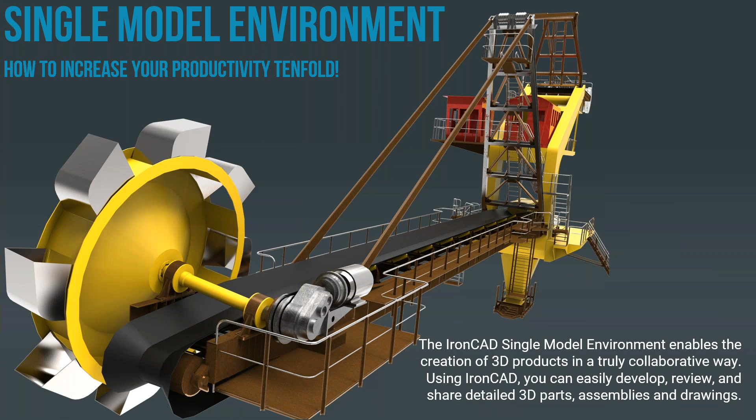This is your group of resellers who will work with you to help train, but let's get right into what is the single model environment, how it can increase your productivity tenfold. The IronCAD single model environment enables the creation of 3D products in a truly collaborative way. Using IronCAD, you can easily develop, review, and share detailed 3D parts, assemblies, and drawings. So let's go right into the product and see what this actually means to all of us.

So here we have an IronCAD scene set up for us. And one of the things I want you to notice right from the very beginning is you have a ribbon bar here across the top: the surfacing, assembly, sheet metal, the home ribbon, all these wonderful tools for doing 3D design, but I'm not going to use them because I won't need to. I want to show you again how this single model environment actually works. And let's start off by creating a mounting plate, and I'll show you how easy that is.

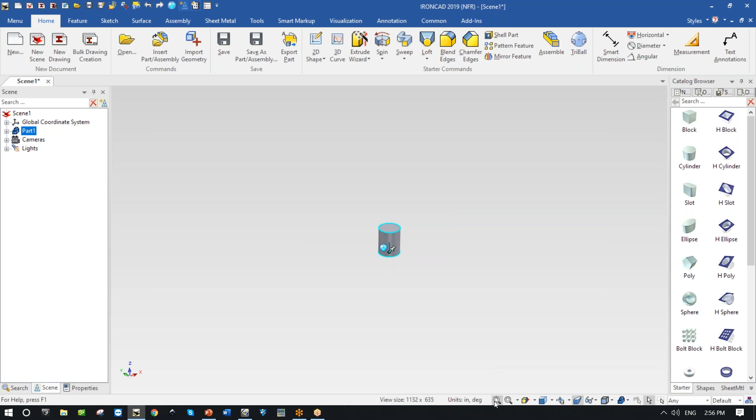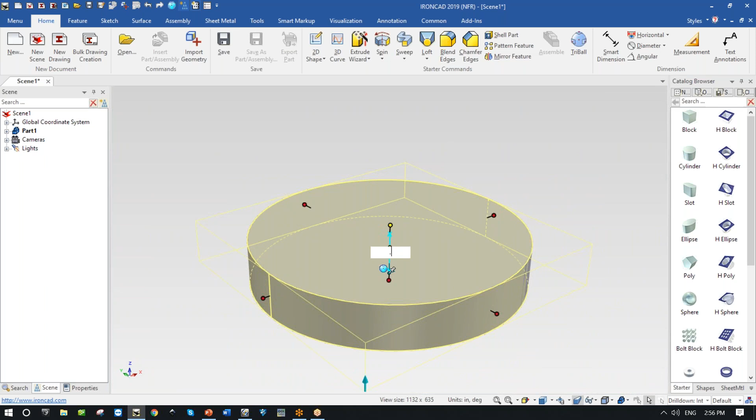We're in inches. I'm going to pick up an object and drop it into the middle of the screen using the left mouse button and simply say, well, I've brought in a 3D cylinder. If I click on that, I can now alter the size of the cylinder simply by saying, oh, I want this to be 6. And how high might I want this to be? Well, looking at it now, I think I'm going to have this maybe a 1/2 inch. That's actually the first part that I wanted to create. That's the back plate of the mounting flange, and I need to put a boss on here.

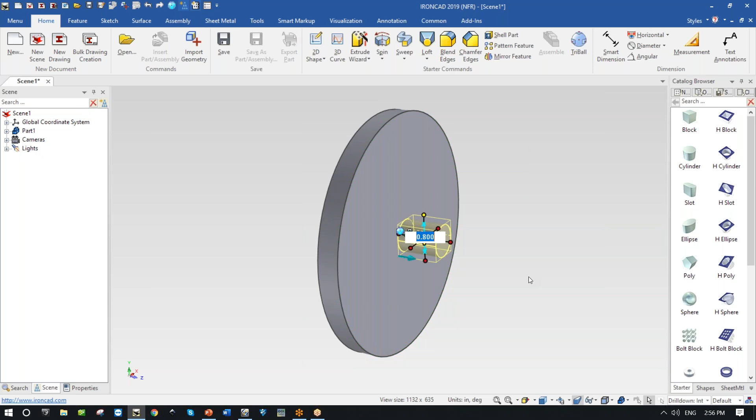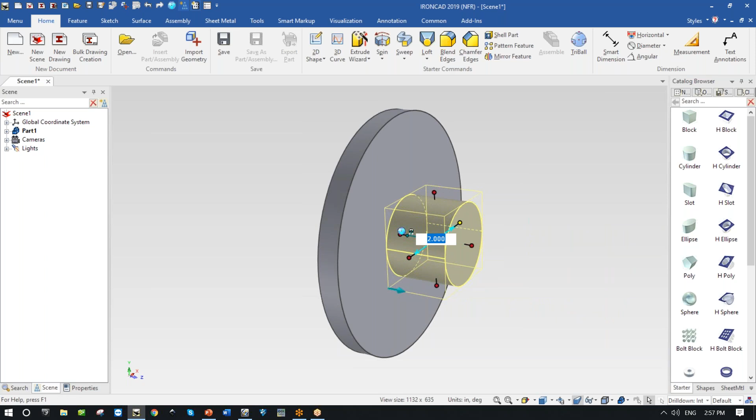So I'm just going to simply drag a part. Notice I'm using the left mouse button and I simply drag to the center. And when I drop it, it brings up another IntelliShape that lets me say, Bobby, how big should this be? It should be 2 inches. This front boss should be 2 inches by 2, and now it has automatically joined these two together. Notice there's no sketching. You know, I don't really like that, that's a little bit long. I'm doing some conceptual modeling. Make this only 1.5 inches. By the way, if I don't like to type in, I can drag this manually this way and then get it into position and then give it the fine tweak that I want.

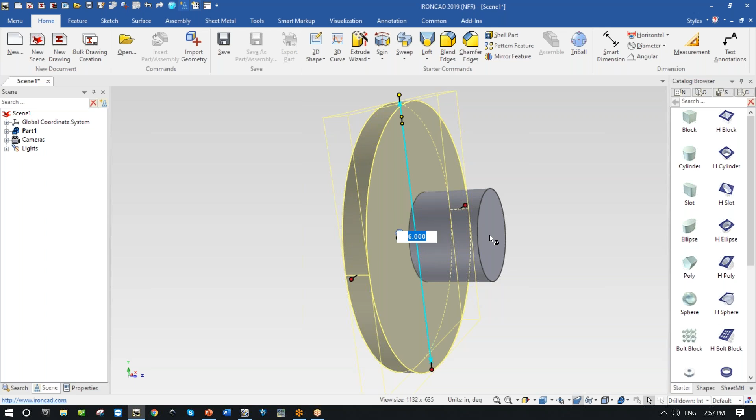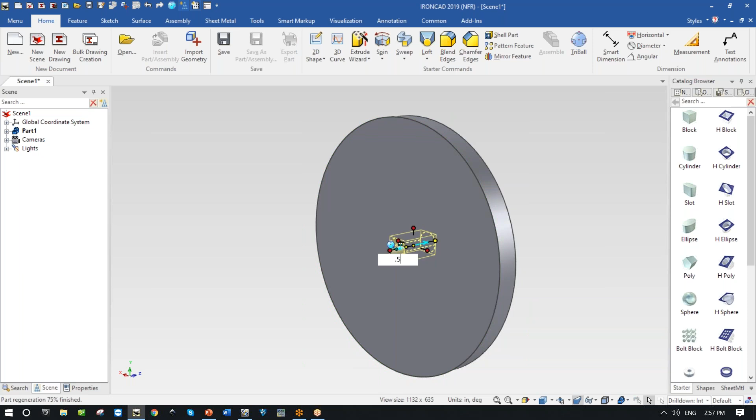Now I want to put a bolt circle, and this is kind of interesting here. I want to be able to pop in a bolt circle around the outside of this, and so I'm just showing you how that's going to work. Get those points off there. You notice we've dragged first a positive shape, being this one. We joined another positive shape to it. Well, now in this single model environment, let's grab a negative shape and simply put that at the center. Notice it finds the center of our part. Oh, 0.8, no, I want this to be 0.5 inches by how deep should it be? Make this hole also 0.5. So now I've got a 1/2 inch by 1/2 inch hole in the middle of my part. I don't want it in the middle. I want it to be out here.

That allows me to introduce something quite remarkable, which is the IronCAD patented tool called the TriBall. And I'm going to use the TriBall in the simplest way I know how. I'm just going to pick up this handle, hold down the left mouse, and pull it out. Almost, nope, I want it to go out a full 2.5.

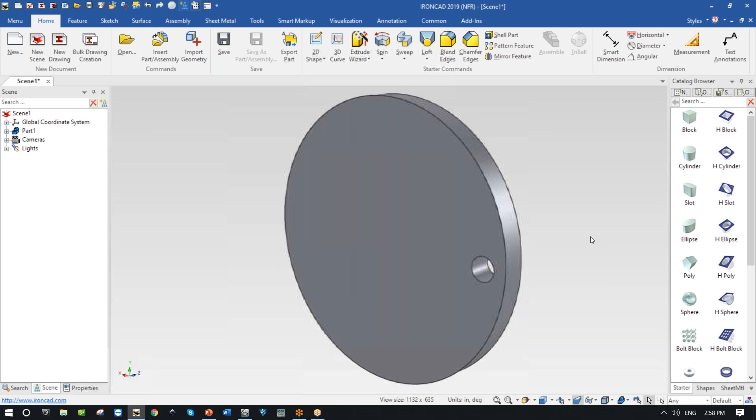Perfect. That's exactly where I want this bolt circle to start. Now notice we're not sketching. I'm just simply using the geometry that's there. And I'm going to use the TriBall again. And this time I'm going to use the space bar, tap, unlock it, and now move it to the center. Lock it again, and this time I want to create a pattern.

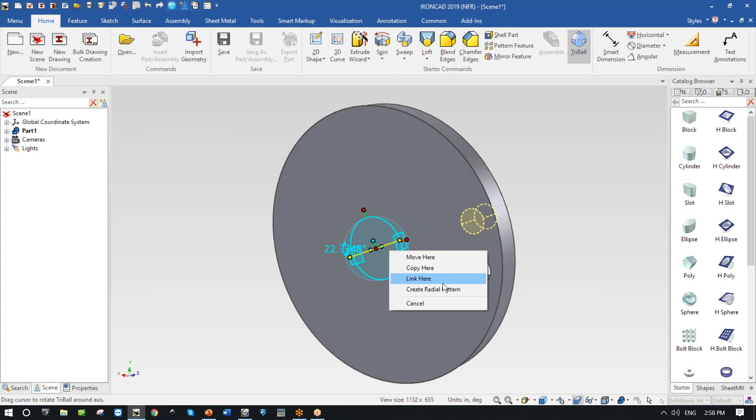How? Simply by using the right mouse button. Anytime I use the right mouse button in IronCAD, it brings up a menu. Go ahead and create a pattern for me. How many holes do you want? I want 12 holes. And what's the angle? I don't know. 360 divided by 12. Excellent. Done. I have now completed my first part.

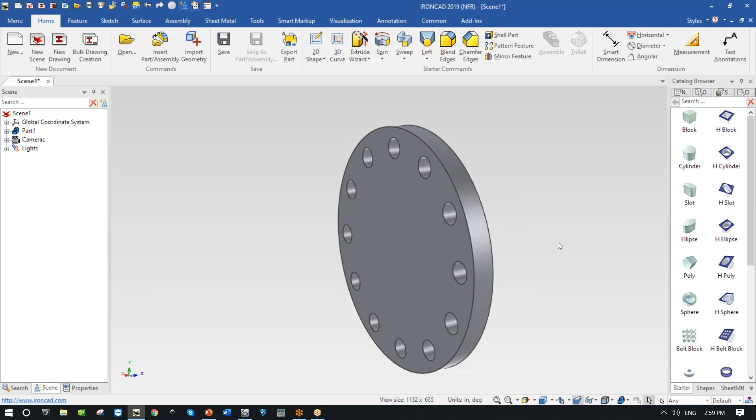So single model environment. I need another part. I need the rear flange. How would I do that? Well, let me just paint this for a moment. I'm going to paint it this color. And now let's put another one in the back. How do we do that? How do we add something to this? Well, gosh, I want to create something based on this.

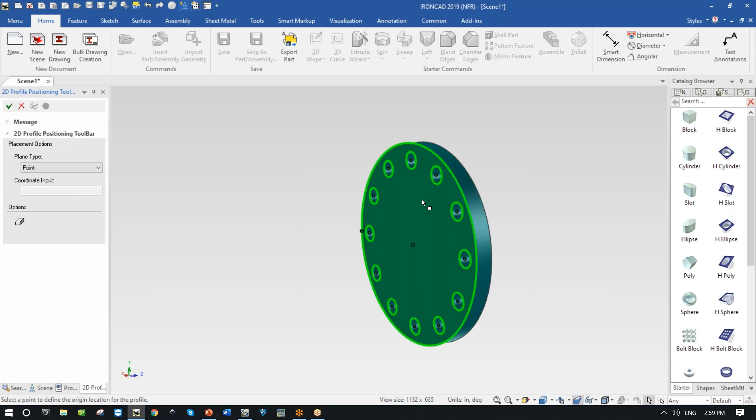So I'm going to use my extrude wizard. This is the first time I'm going to a menu, but I'm still not going to sketch. I'm going to come in and say, where do you want to start this new part? Here. Do you want a standalone? Yes, that's what I want. I don't want to add material. I want a new part. And it asks me, okay, no, I don't want to do any of those things. Oh, I want a 1/2 inch. What's the distance? 1/2 inch. Excellent. That's all I need.

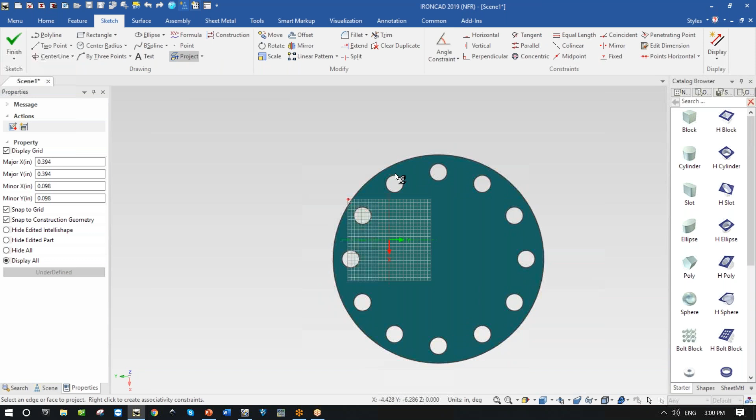Done. So now it says, Bobby, what are you trying to do? Well, I just want to take the geometry from this. That's what I want to use for my next part. Okay, great. It says, that's what you asked me to do. Use that geometry to create another part here. Single model environment. Now I can just start drawing on this new part. Well, I want this to be 3 by 2.

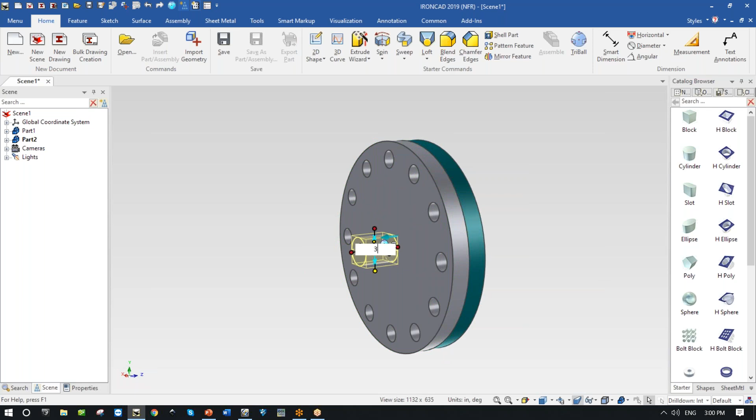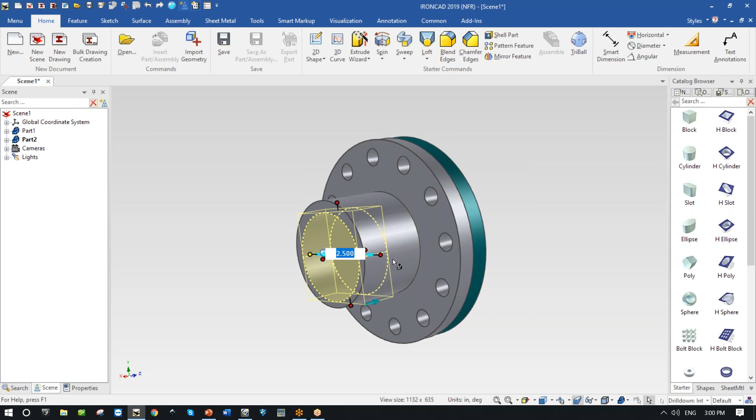Excellent. So now I've got the front flange, rear flange. Notice that it picked up the holes. They're in good position. Oh, I need these to have a hole going through them. So let me see. Drop this in here. How wide do I want it to be? Oh, 2.5. Excellent. And how deep should it go? I don't really know. You know what? I want it to go to the back of the flange. So that's right here. Just touch it, hold the shift key, and it finds it.

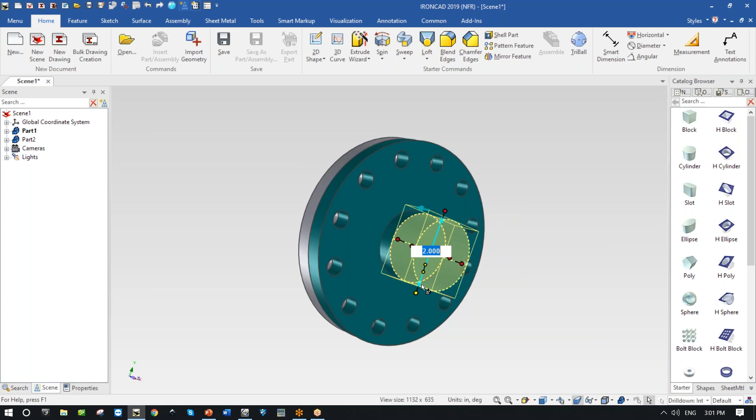Oh, I need a hole on this side too. Doesn't matter. Forgot to do it before. I'll come back and do it now. Remember, I made that too. But if I forget, all I have to do is come out like this and stretch it and say, how big is that? Oh, that's 2. I want it 1.5. Good. And how deep should it go in?

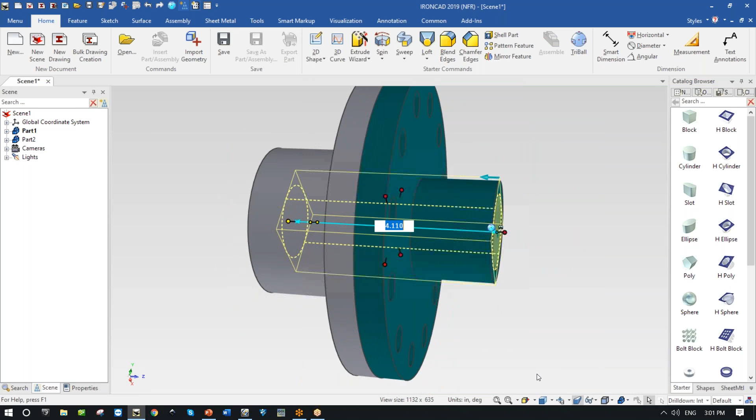Oh, just come right to, oh, moving it around. Silly me. Don't do that. I want you to grab this handle right here. I don't want you to move the whole thing around. And I want to pull this all the way into the part right there. And now it's cut. Oh, not quite. Let's see if we can get it to cut all the way through. Oh, you know what? I'm not even going to be too careful with it. Go ahead and cut all the way through. I've got one on this side, one on this side. Excellent. That's what I wanted.

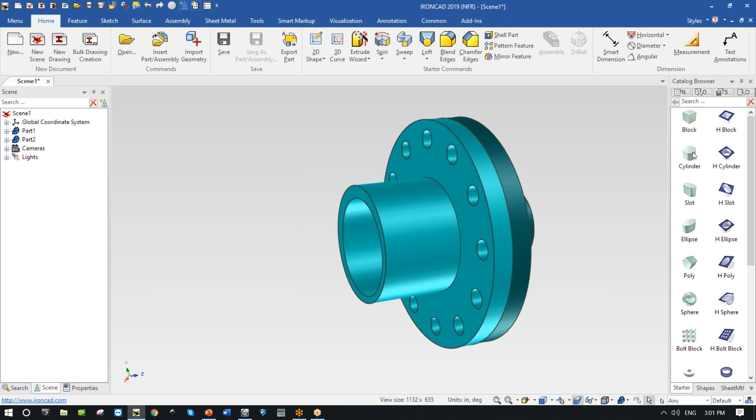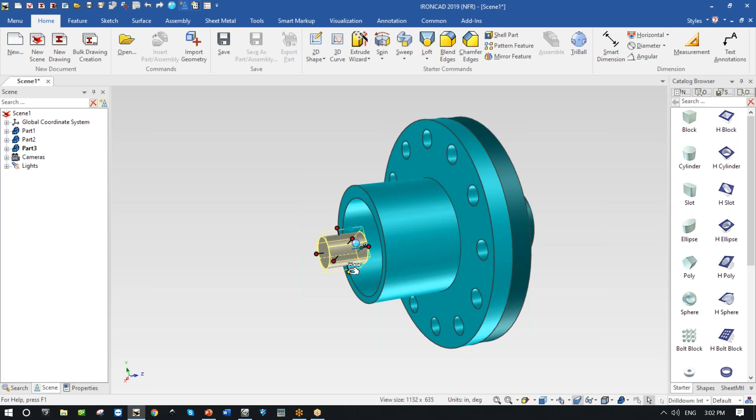And now this is my next part. Let me make this a different color. I'm just painting them so I can see. Excellent. Now, no sketching up to this point. Let's put a cap on here. Now, that allows me to show you another marvelous feature of this product, and that is using the drag and drop. I'm simply coming in now with the right mouse button instead of the left, and it says, do you want to add a feature to this? No, I want a new part. And so what I'm going to do now is come in and say, I want you to take this part. How wide should it be? I want this to be 3.

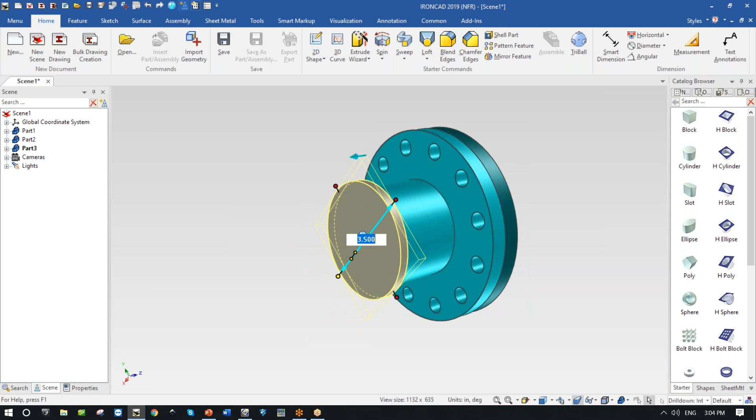So now what I want to do is I really want to take this and I want to make it slightly larger than that. Conceptual design. Yep, make it 3.5. And from the front, I want it to stick out about 1/4 inch. And back here, if I zoom in, I want to pull this maybe 0.75. So there's my cap sitting on. But if I look at the cap now and say, just show that, oh, there's no hole, there's nothing there. So show me everything.

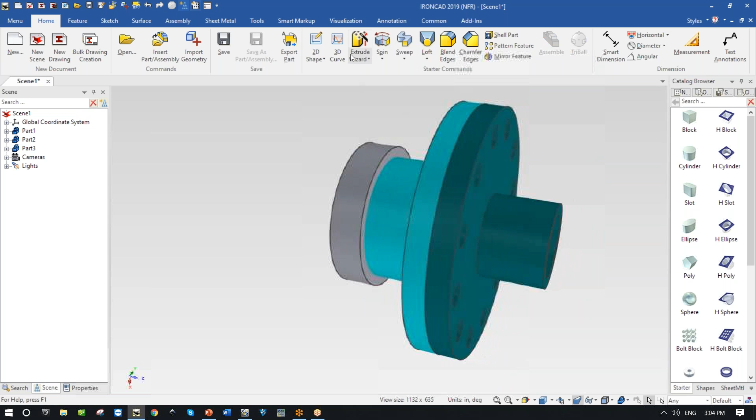Same idea again. I want to extrude right there. I need to now remove material using this wizard. And how much material do I want to use? Get rid of 1/2 inch. Good. And what are you trying to get rid of? Well, I really want to cut out this shape.

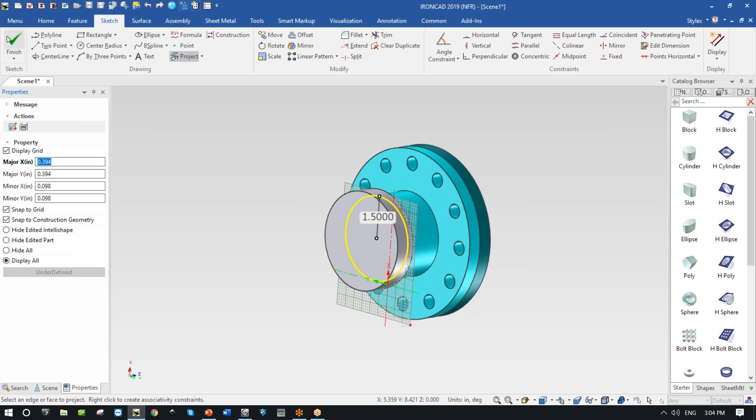And good enough, in that one quick thing, I was able to say, good, there, I've done that. Excellent work. So I've got my part, show me everything again. And remember, I haven't had to go in and find a lot of menus. I'm creating this geometry.

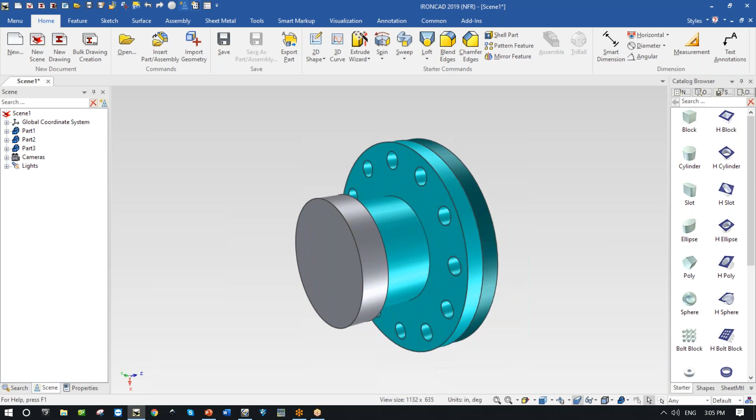So what about holding this together? Let's go grab one more interesting part from our catalog, and let's go grab a tool out of here. And I need to fasten this together. So let's grab a fastener out of our library that's included with IronCAD. And well, what are you trying to get? I want a screw. What kind of screw? I would like a socket head, yes, just like this.

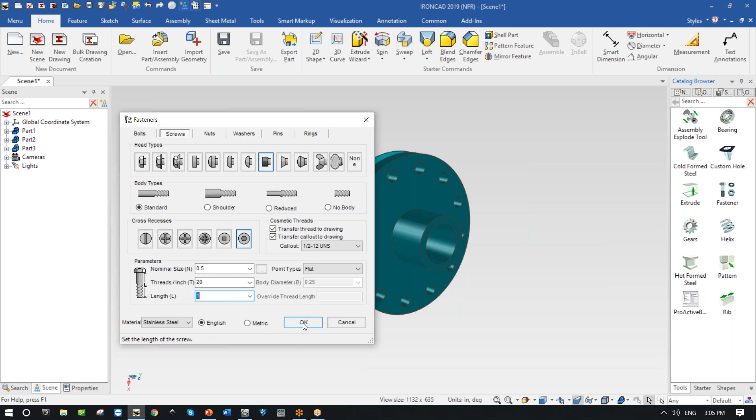And how big should it be? Gosh, give me a socket 1/2 inch and make it 1 inch long. Good, excellent. I know that it's an inch part. So now here's an interesting idea. The new part dropped on a pattern. Yeah, go ahead, put it on. Wonderful. There's a time-saving device for me. And I notice now, excellent, I've held this all together.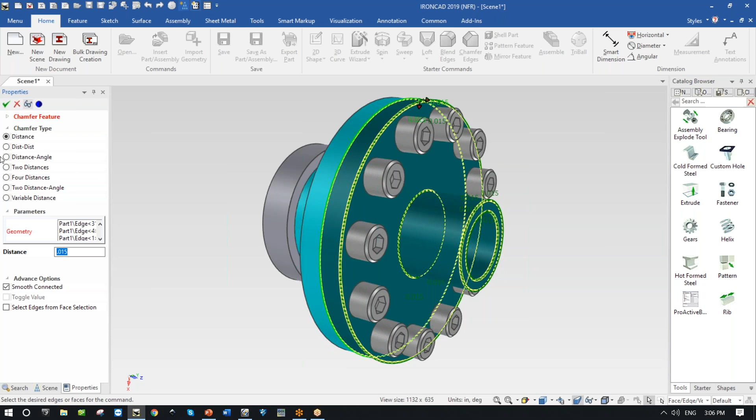Last thing before I finish, though, I noticed that I didn't do any. These are sharp edges. Let me come in and maybe do a tiny bit of little work just to get this ready for manufacturing. Simply come in, right-click, chamfer this edge, maybe 15 thou edge break there. I just don't want sharp corners, and I'm going to do it there. I'm going to leave that sharp. And no, you know what? Good enough, done.

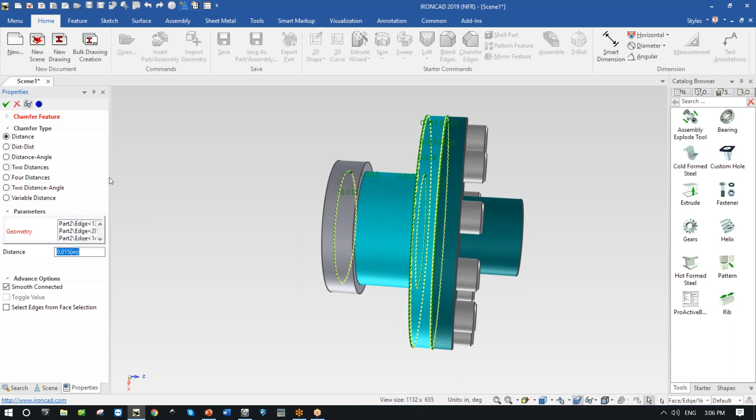And if there are any other edges, I can go ahead and I've now chamfered those edges beautifully. Do I want us to do the same thing in the back? Well, maybe I might do that. Come in and say on this edge, chamfer as well, here, and back edge as well. And what about, I can't see this one. How do I get at it? Oh, again, which edge do I want? This part number, yeah, it's the second part I made. Go ahead, even though I couldn't see it, go ahead and put that on the edge for me.

That reminds me of something else. Now, these parts that I've just been creating in this single model environment, I can now come in and say, I'm ready to release this and create a drawing. Oh, this is the front flange. Only now am I going to actually name these. Excellent. This, well, that's easy. That's the rear flange. And this one was simple as well. This was our cap, made up of the cylinder and a simple extrude. Nice, like that. So the cap.

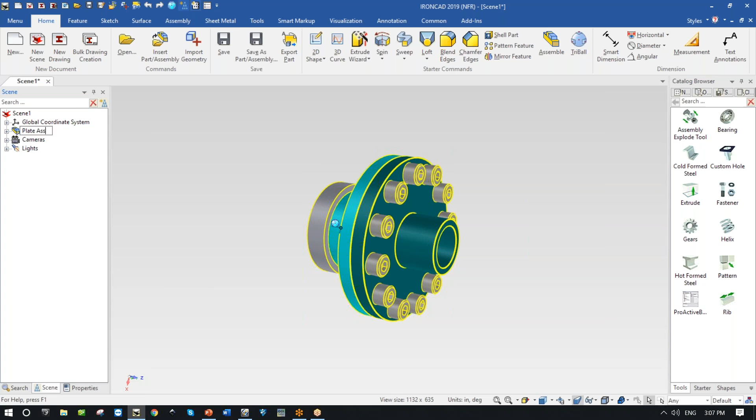And now, how difficult is it to create an assembly in IronCAD? Well, let me just see. Select all this, including my pattern, of course. And we want all of these things. Good. Put them all together and say, assemble that. We now have one assembly, that's great. It's our plate assembly. Good. So this is our assembly. That's how difficult it was to create that. Once I've saved the plate assembly, go ahead and save it. Good. This is now done.

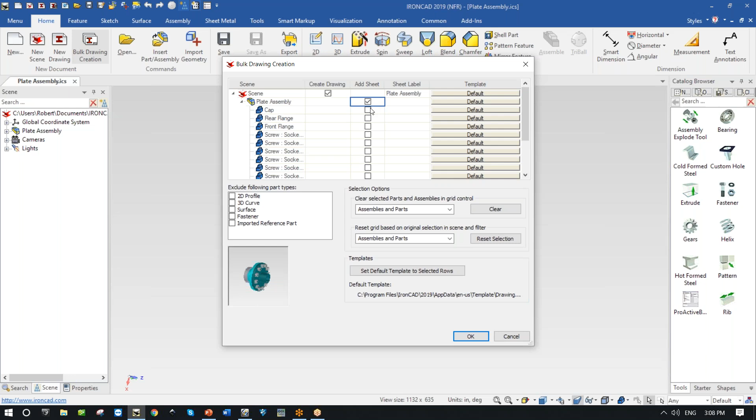What about communicating with the outside world? Well, excellent. Let's go create a drawing, multiple drawings of these. I want you to start off, give me a drawing of the scene, the plate assembly, the cap, front and rear flange, and I might as well have one drawing of the socket head cap screw. Go ahead, create this for me. And now with literally one button click, I am getting all of the drawings that I need.

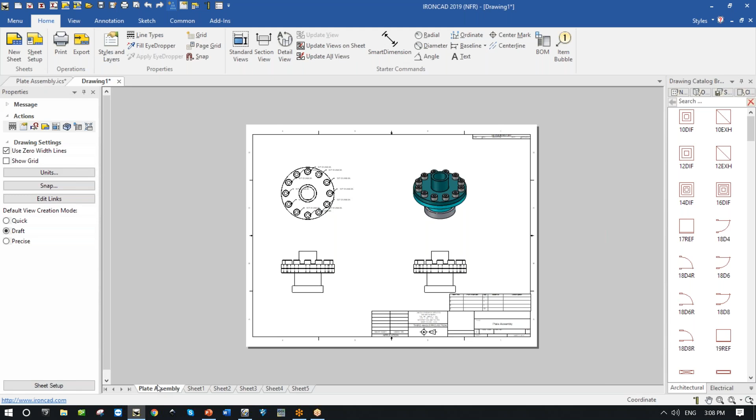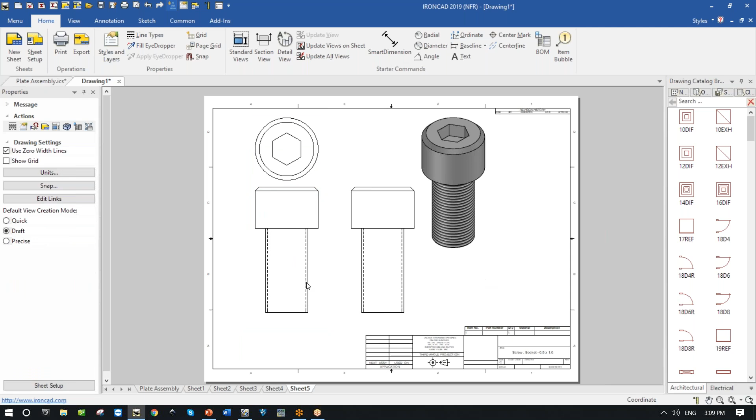Let's take a look at what this has given to me. Oh, there's the actual scene that we've got going. What else do we have? There's the cap, there's the full assembly. Oh, the front flange, rear flange, excellent working. The actual bolt that we brought in, all this is excellent. So it's put all of these things into our, hey, I need to move you up a little bit. Excellent, out of the way. And there I have my drawings created very, very quickly.

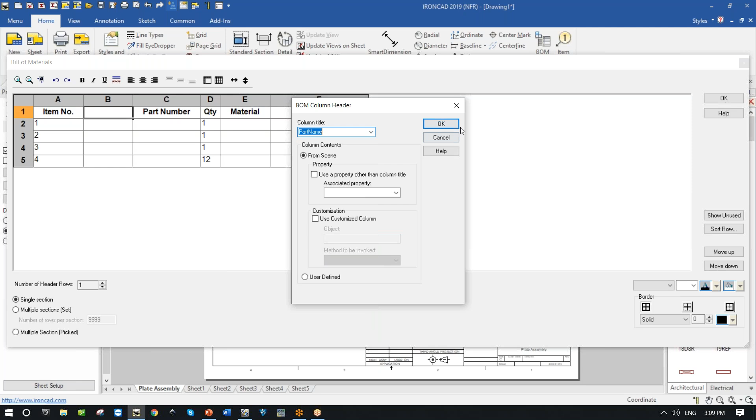Oh, I just realized something. I want to take a look at this. And as I'm looking at this particular part, I see there was a bill of material done for me. Oh, I didn't put a part number in. I actually put a part name. So yeah, go grab the part name for me. Excellent. And put it right there. So, what did I call these things? And oh, there's the cap, rear flange. It'll find all those. I didn't give it a number, so I don't really need that column. But I do want to know how much these things weigh because I need to do some costing.

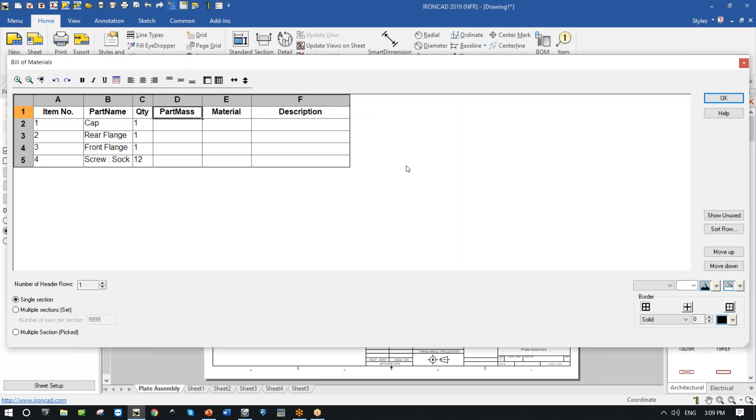So how can I do that? Double click, give me the mass or the weight of this part. Excellent. And you know what? I don't really need a description because I didn't add a description.

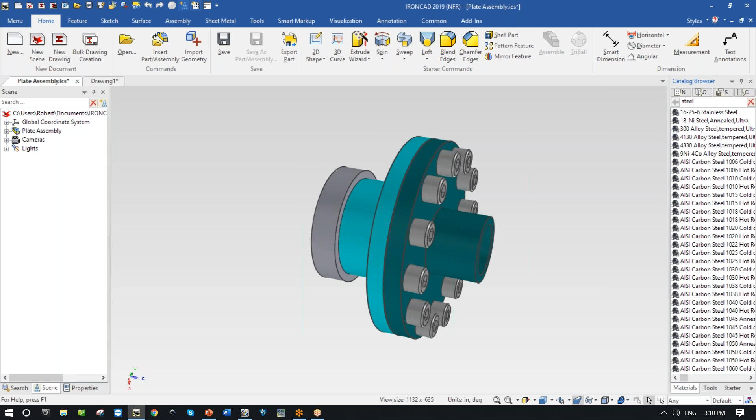Good. Well, what happens if I go back to my scene, just like that from the drawing? And I didn't put any material in here. So, well, how would I add that? Single model environment. Come into my materials. I need some steel. 1018 cold roll. That's what this is going to be.

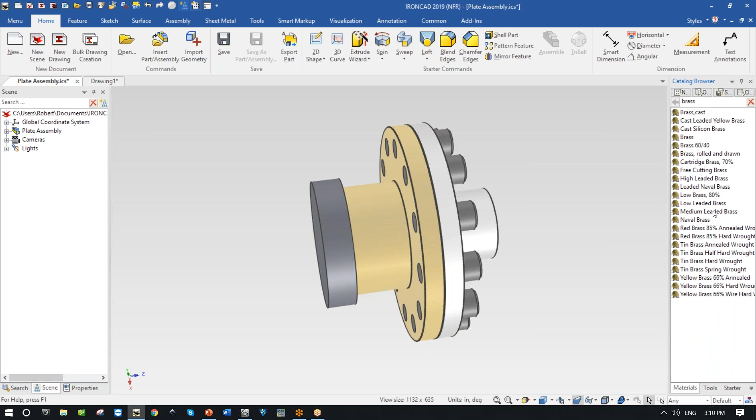Thank you. And the back flange, I know somebody told me for some reason it's a bronze, and this is manganese bronze. Can be an expensive part. And the cap is made out of brass. So let's go see what, yep, low-leaded brass. I've now added these materials.

And what happens when we go back into our drawing? Simply by coming into the drawing, it says, Bobby, this needs to be updated. So go ahead, update the views. And whenever I look directly here, it says cap, and what are all these? Yep, there's all the weights, the masses, everything is in. So very quickly, without being in any particular mode, we were able to create this assembly.

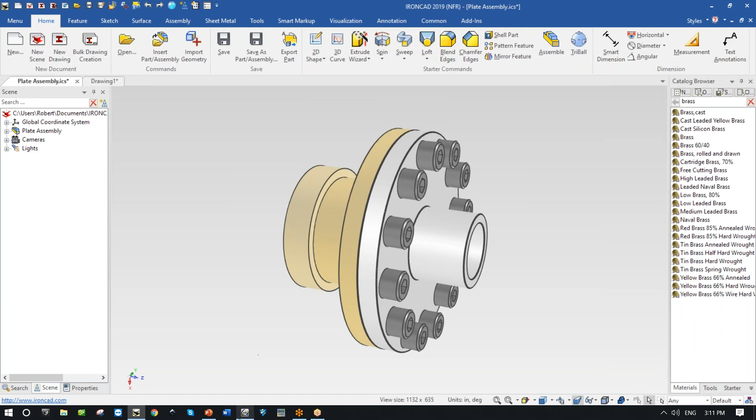And as you can see, one last thing I want to show you, which I think is quite marvelous. I'm going to grab the assembly now and say, well, what would happen if I wanted to open it up? So I'm going to say, open this and store the positions. Great. So I'm now in the open position.

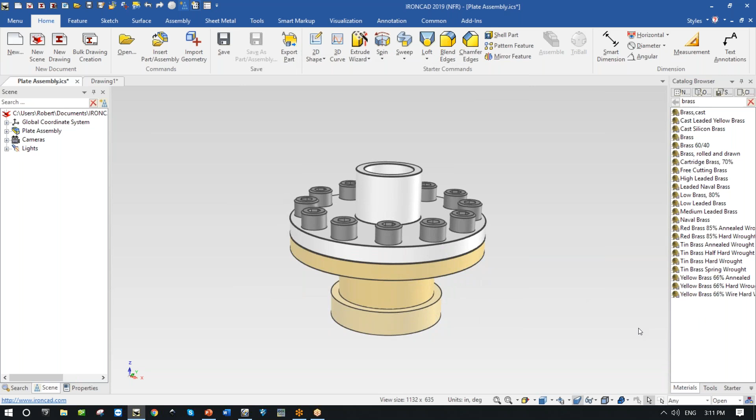I'm going to use my tools and say, go ahead, explode this whole assembly for me. I'd like to see how that happens. So it's moving all these shapes. Double click. Oh, excellent. So it exploded these into a position. And now when I go back to the drawing, well, this hasn't changed because quite frankly, I

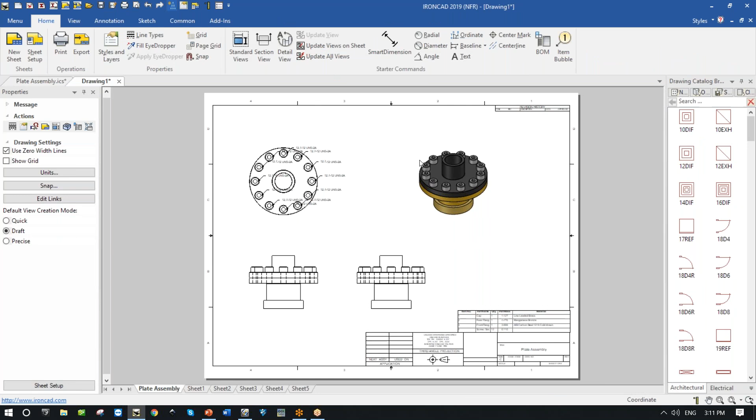didn't do anything, but I have this capability now where I can say, show this to me in an exploded configuration. And very quickly you can see I've got all of these parts all done in a single model environment. This is the whole idea behind single model, is that you manage the design the way you think with intuitive, instinctive design tools.

I didn't need to have a separate mode for part and assembly modeling. Didn't need it at all. I just thought about designing parts. I didn't need to insert parts from a different file. Came out of a catalog and I built it. I didn't need any reference parts unless I defined them. And I had no need for part numbers or naming until release.

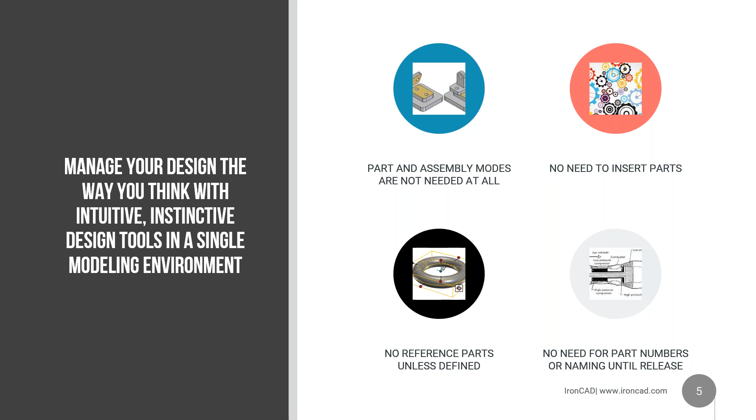So we truly believe that IronCAD's single model environment delivers much better 3D design, and we'd love to prove it to you. So we're going to help make it happen. We feel that many people can become very comfortable with IronCAD in hours and days. It's not something that takes weeks or months or even years to learn. It's something that can happen quite quickly.

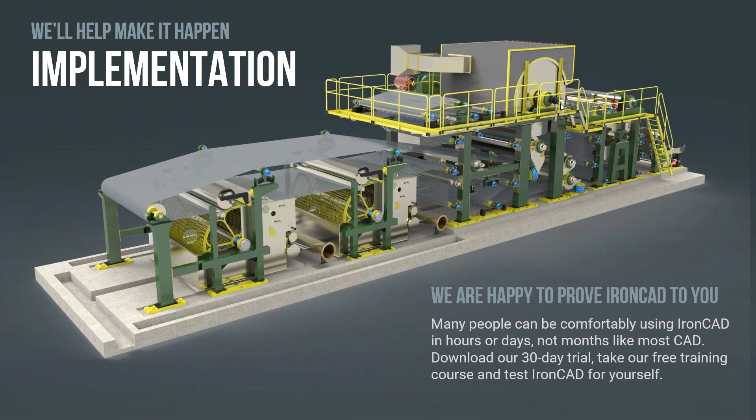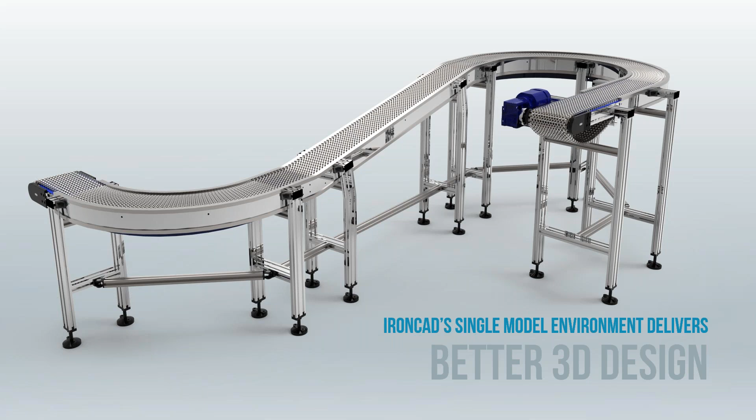Oh, I've got a question now. Let me just take a look. Gary from Indiana, what if I want parametrics? Well, we offer the best of both worlds. If I looked at this particular part that we've just created here, and I go back into the assembly.

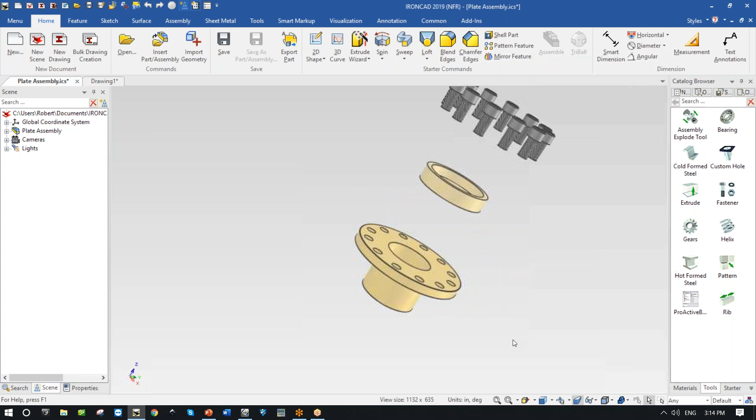And any time, by the way, I don't want to be in the open configuration, I could just come in and say, I need to close this, open it. This gives me a way of really controlling how this works. And if I go back into this particular part here, you can see at any time.

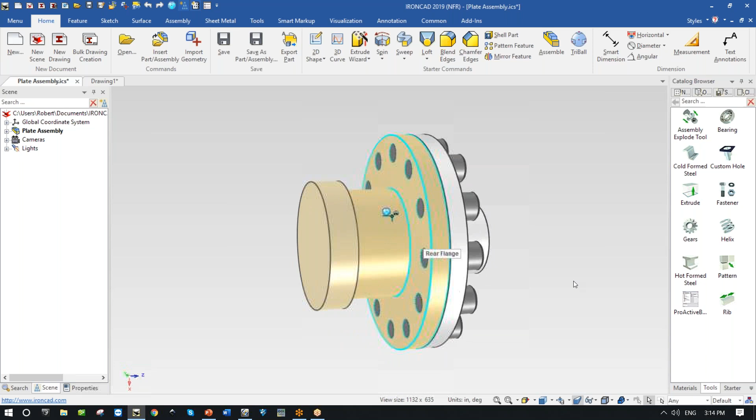I can go back at any time and close it up again, as you can see here, just by going into this. And I can go back and make any changes I want, or I could go back into the original design of this and say, I'd like to edit this. I want to edit this part.

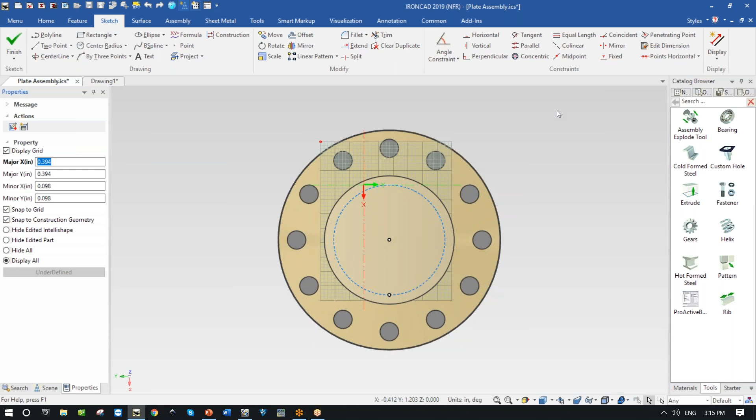Everything that we've created has the associative geometry at any time. We can go in and add parameters, any of that type of thing, and work the way that you would like to work.